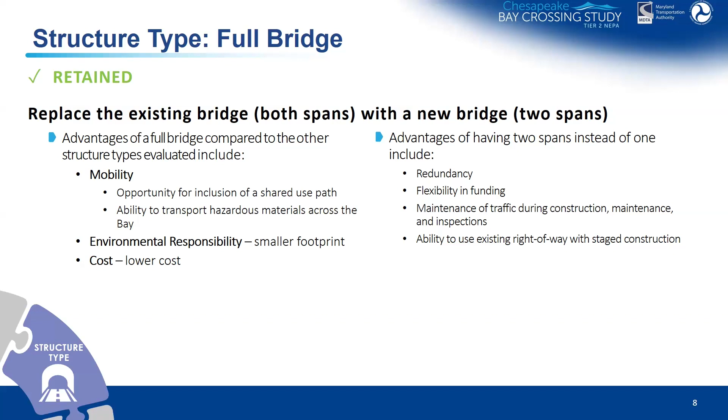So a tunnel has not been retained, or any alternatives that include a tunnel, these have not been retained. We did hear a lot of comments that maybe a tunnel would be worthwhile, given that it would not restrict the navigation channel. It wouldn't create a clearance issue for navigation coming up the bay. But overall, there would be substantial environmental impacts to the shorelines.

There would also be requirements for very large ventilation islands and for large additional bores for ventilation. And this is because you have to vent tunnels, and this is a 4-mile crossing. It would honestly be one of the largest tunnels in the United States, and that creates enormous engineering challenges.

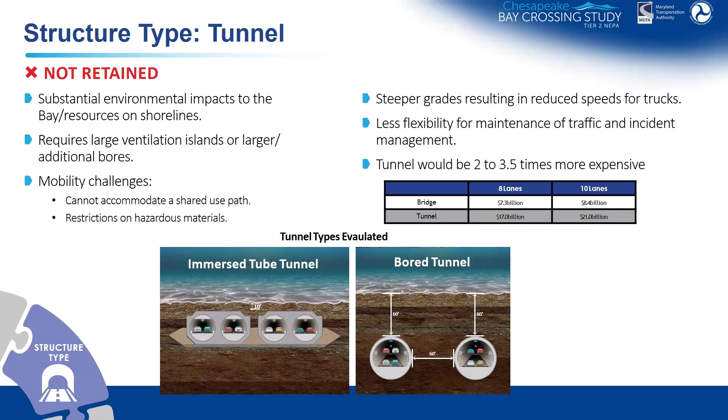Okay, next slide. Another thing we looked at is the alignments relative to existing US 50/301. So we actually made an early decision to not stray far from US 50/301 with our bridge alignment or our crossing alignment over the bay and on US 50/301 because of the substantial amount of development and environmental impacts that are associated with going off alignment with basically a new roadway that would be separated some distance from US 50/301.

So it's important to note that any of the improvements that we're talking about here with the ARDs would be very close to the existing US 50/301 alignment. In essence, we'd be talking about widening US 50/301 by one lane or by no additional lanes, depending on the alternative, and I'll get to that in a moment. But on land, and then the crossing of the bay would also be very close to the existing Bay Bridge.

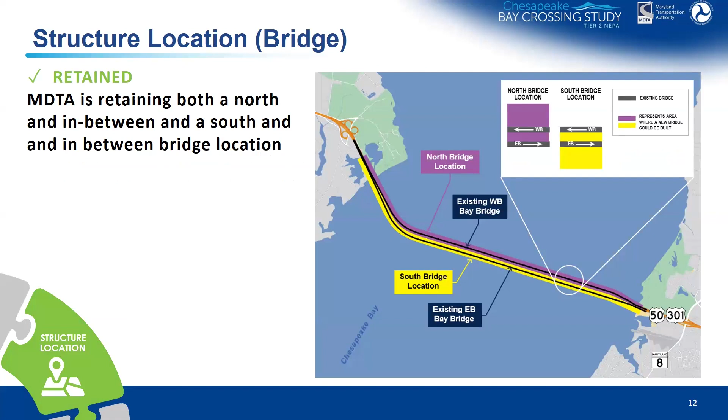Okay, next slide. So the structure location, as I mentioned before, would be very close to the existing bridge, and what we would be retaining and moving forward is a north bridge location as shown in purple there, or a south bridge location as shown in yellow. And we're going to talk a little bit about where specifically that location is, I think on the next slide, how we can sequence it to be more or less in between the existing bridges. One of the spans would be in between the existing bridge locations.

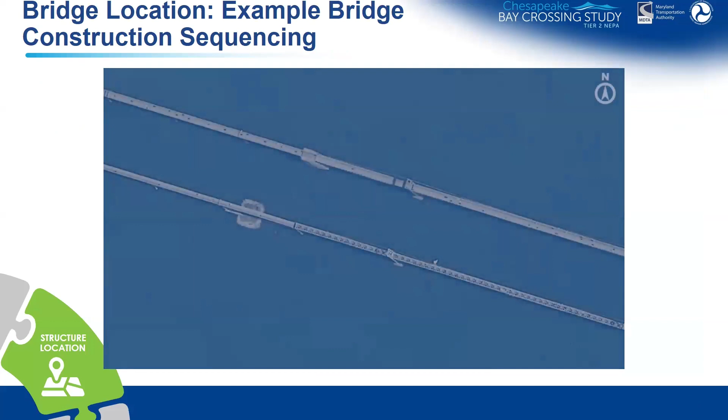So next slide. So if you could start this video, Todd, thanks. So this is an example of how the sequencing could occur for a south and in between bridge location. I'll just walk through this. So again, very close to the existing Bay Bridge span. So those are the existing spans shown there from an aerial photograph.

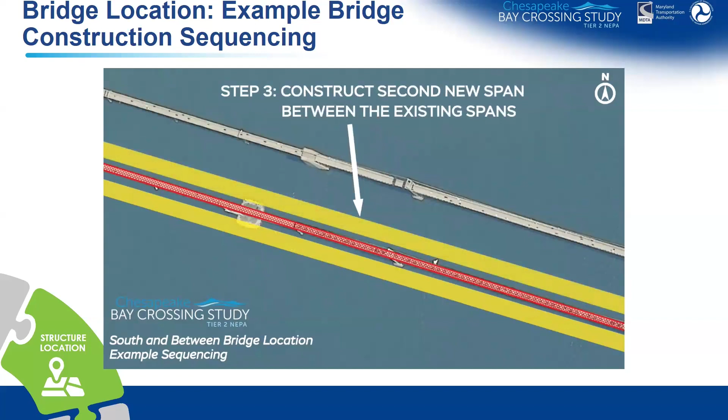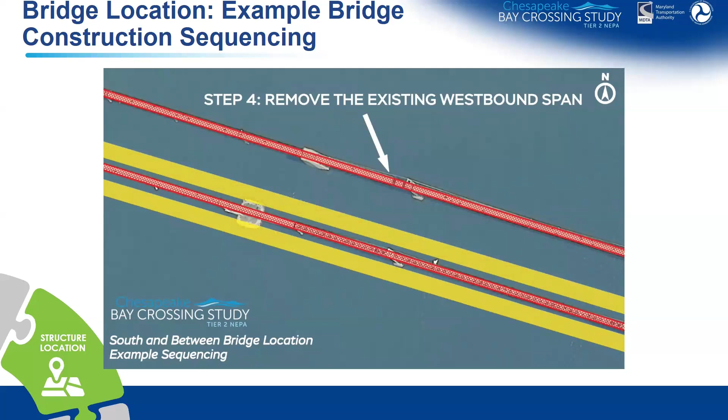So the first thing that would happen would be construction of the first new span to the south of both spans. Then we would remove the first existing span, so the south span. Then we would construct the second new span, again very close to the old span, and then we would remove the existing westbound span. So there's also a scenario that would be the same as this, but just on the north side. Okay, next slide.

We looked at a number of different transit options, including bus service, which we would be advancing for more analysis. So we're looking at things like enhancements to local bus service and to commuter bus service and intercity bus service. The types of improvements could be a 24-hour dedicated transit lane on the bridge, a congested period only dedicated transit lane, bus on shoulder operation, and perhaps queue jump lanes as well. So all of these things are still under consideration with the ARDS. Next slide.

Also, there would be extensive environmental impacts associated with a new rail line. Just to get the new rail line to the Bay crossing itself, rail does not currently exist to the shores of the Chesapeake Bay. So that would mean a lot of new infrastructure. Same thing with bus rapid transit. Again, really just a very small reduction in volume, and it would be a substantial amount of infrastructure in order to implement a BRT ultimately.

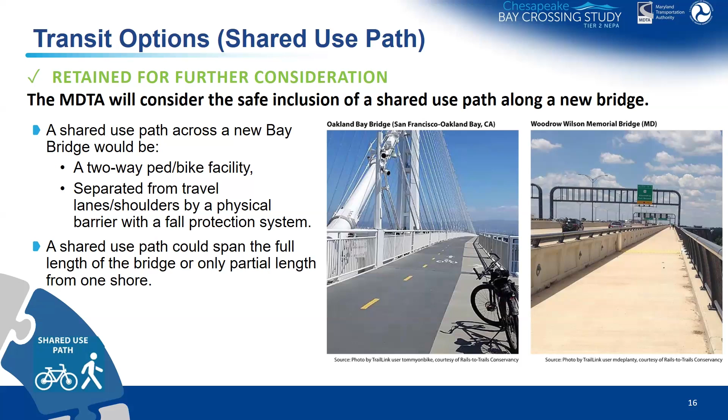Okay, so we also are looking at a shared use path. Again, we've received a lot of comments regarding a shared use path, and MDTA is taking a hard look at the safe inclusion of a shared use path as part of the ARDS. We are considering it as a potential two-way ped bike facility separated from travel lanes with a physical barrier, and it would span the full length of the bridge, or maybe it would just go partway up for an observation location or something like that. But we are looking at that carefully as well.

Okay, next slide. I think we are to Heather again. I think this is where I take over again. So the next couple of slides are to let everyone know that the alternatives retained for detailed study that we are proposing are largely the same as what was included in the notice of intent. So if you go back and review that, there are two changes that we have made to the ARDS moving forward.

So the first is the structure location. As Eric mentioned, we are only carrying forward, or proposing to carry forward, the north and in between and the south and in between locations for the new structures. The all north and all south locations are not recommended because they would result in additional impacts to those very sensitive resources compared to using the space between the existing bridges.

Next slide. The second difference in the ARDS is that we are not recommending to carry forward interchange consolidation as a TSM TDM improvement, because there are a lot of local residents and businesses that rely on all of the existing movements. So we're recognizing that, and we want to be sure that everybody continues to have all of those movements available. And so we are not proposing to move forward the interchange consolidation TSM TDM improvement.

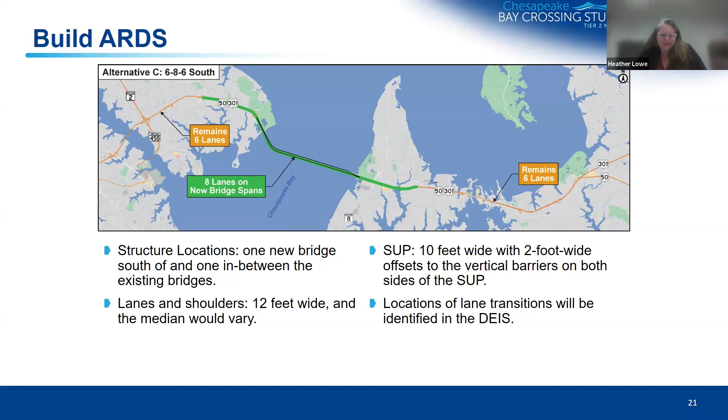So next slide. Alternative C is the 686 alternative with the new bridge location being one new bridge south of the existing bridges and one in between. Next slide. This is alternative D. It's the 888 north alternative. So that new structure would be one new span north of and one new span in between the existing bridges. Next slide.

This is the 888 South alternative, which is one new bridge south of and one in between the existing bridges. I do also want to mention that on the western shore, widening would occur to the outside in both directions. And on the eastern shore, we'd be looking first to widen to the inside of the existing lanes in both directions and then to the outside as needed. Next slide.

So this shows the 8-10-8 north alternative. It's alternative F. There would be one new span constructed north of and one new span constructed in between the existing bridges. Next slide. And this is alternative G, the 8-10-8 south alternative. Next slide.

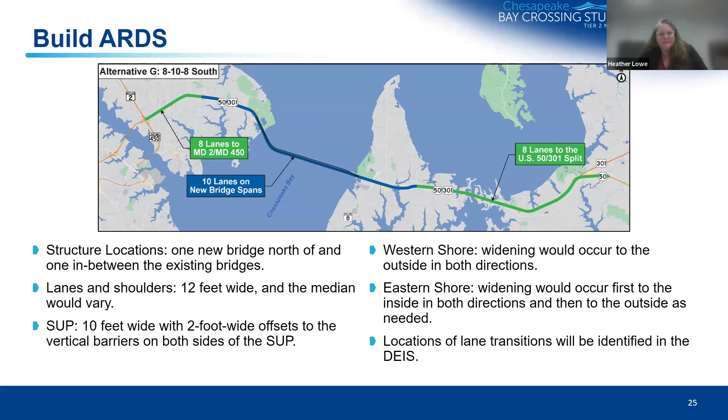So for our current activities, we are working on summarizing and reviewing those open house comments and working on the alternatives retained for detailed study as we move forward into the next few months. We expect to receive concurrence from the agencies on the ARDS this month, and moving forward, we're preparing that draft environmental impact statement that I mentioned earlier. It will be published in the fall of 2025. And we also continue extensive public and stakeholder engagement.

So if there are any community activities that you think would be a good fit for the Bay Crossing Study team, please reach out and let us know. And if there are any meetings that you would like to have our team come out to present and talk with folks, please let us know about that as well. Okay, next slide. So that's all the slides we've got today. Are there any questions?

Heather, I have a question, if it's okay. Sure. Mr. Chair. Hi. I'm Chris Jakubiak. Hi.

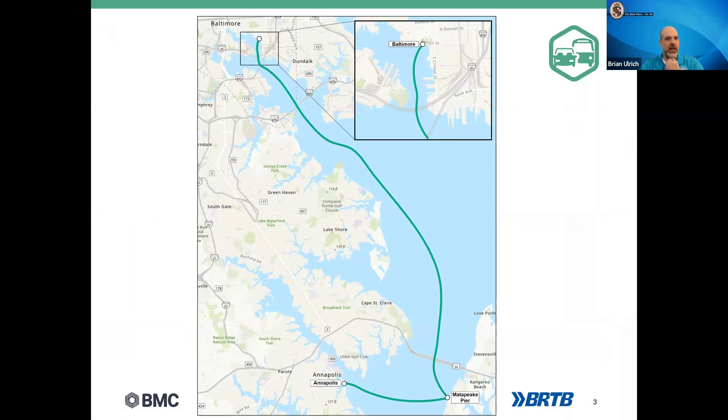This is how the funding is broken up from the grant. Large majority of it is for up to 2 passenger ferries, but there's also money for landing improvements and charging infrastructure. And then next slide just shows kind of the table for the amendment specifically. And then I believe that's it. We'll take any questions if you have any, or if you want to wait. I don't know how Todd wants to do it, if you want to ask now or wait till the end. Let's wait till the end if we could, please.

Yep. Okay, next we will move on to MTA and the TIP amendments from MTA. Hi, Jamie Richardson here from MTA. I'm just going to present on 2 amendments, our Urban and Rural Transit Systems Capital Assistance. So as a reminder, when MTA obligates a grant, we just have to show the funds in the year of obligation. Next slide.

So rural capital assistance, this was previously in the TIP, but we're just adding it to the current TIP. So this amendment and funding supports preventive maintenance in Carroll County and in Baltimore County for 4 medium-duty buses. So that's $4 million in 5311 funds and $1 million in local and state match.

Next slide. For the urban capital assistance, this is funding supporting Harford County with their FY 2021 bus facilities grant for vehicle purchases. So expecting to obligate that grant in FY 2025. And this will add 1.4 million in 5339 funds and then 265K in match for that grant. And that's it. So any questions, please let me know.

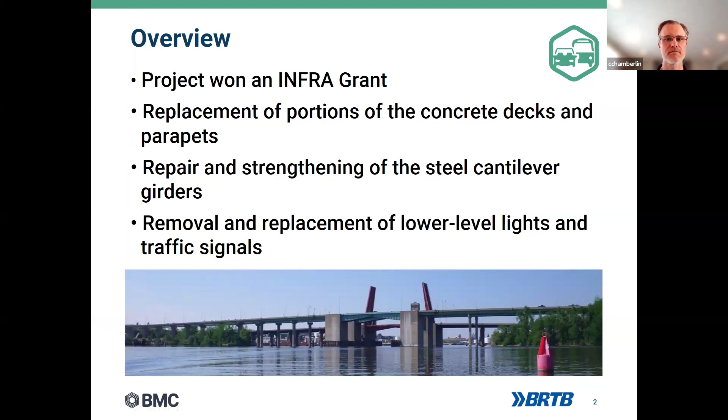So MDTA includes projects in the TIP when they have either federal funding or they're of regional significance. In this case, it's for federal funding. So the project won an INFRA grant. It's basically a system preservation project. It replaces portions of the concrete deck and parapet, repairs and strengthens steel cantilever girders, and there's a removal and replacement of lower-level lights and traffic signals. So pretty straightforward scope. This Curtis Creek Drawbridge is close to FSK.

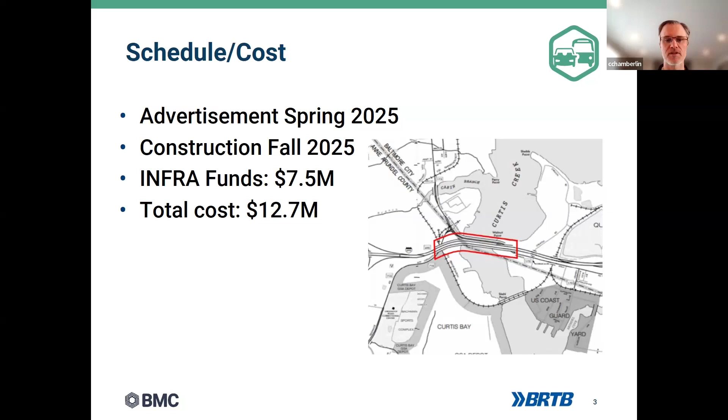We moved forward with some projects after the collapse of the bridge, recognizing that there's going to be less traffic on that facility. So we're trying to move through a couple of projects that were already planned, and this is one of them. And we were lucky enough to win a grant for the construction. Advertisement is planned for spring 2025. Actually, I think the last I heard was it's going to be in about 8 weeks. We'll be advertising the project. Construction is expected for fall of 2025. INFRA funds are going to be $7.5 million, and the total cost of the project is $12.7 million. And that's it. I'm happy to take any questions.

Mr. Chair, we now ask the BRTB to consider Resolution 25-24 to program the INFRA grant for the Curtis Creek Drawbridge Deck Rehabilitation and Resiliency Project. All right, I now ask for a member to move for the approval of the resolution, and can we get a second? Howard County moves. Baltimore County will second. Now, do we have any questions from the BRTB members about the resolution?

Hearing none, we now ask that any member of the public with any questions or comments on this resolution please indicate so within the chat box. Todd, has any member of the public asked to speak? Mr. Chair, currently there is no member of the public requesting to speak on this resolution. All right, now we'll proceed to the vote. And once again, with your cameras on, when Rebecca reads your name, please indicate yay or nay.